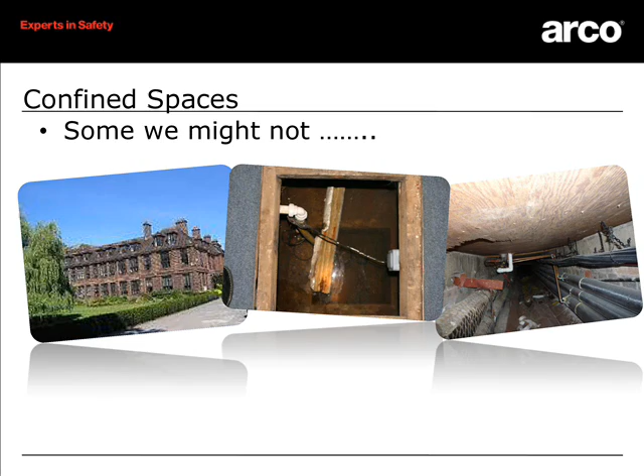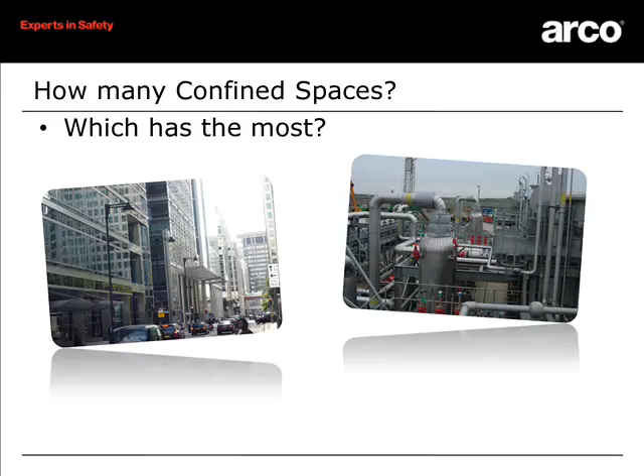Taking the building we've just looked at, just for the avoidance of anybody thinking he's talking about big buildings but I bet he doesn't really mean it, I bet there aren't any really - if you only need to right-click Google, you can find stuff out. Pemex is the... so this is in the public domain, so I'm not telling any tales, because you can't really do something like that without it being in the public domain.

That's the National Oil Company of Mexico, where they built that building, like many of the buildings down the East End developments in London, where they're built on a brownfield site. So brownfield sites are built near docklands, there's inevitable contaminated land and the like.

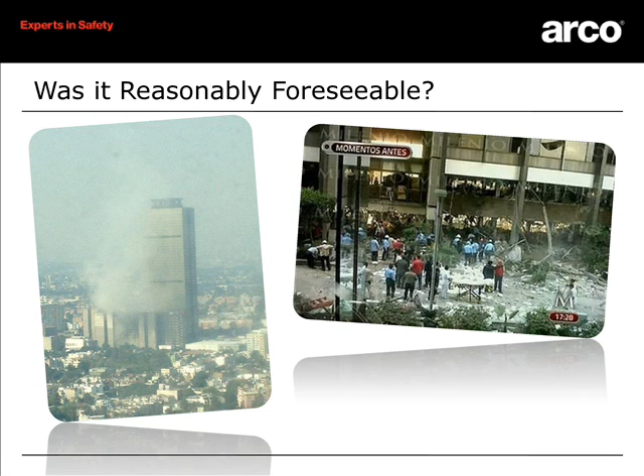For me personally, you're on this borderline thing: do I call it a confined space or not? It's the kind of place where when I went down the first time to look at it, was I gas monitoring, doing a personal gas monitor? Did I have an escape set on? Absolutely, because I simply wasn't sure where I was headed. We could pick up increased methane levels, but the main thing we can pick up down there is reduced oxygen levels. Don't forget, oxygen has only got to drop 1.4% to go from what is normal to what sets off the alarm on an oxygen monitor. Only 1.4% - not very much at all. So that's just making the point.

That's in London. So I've brought the Mexico thing back here now and I'm showing you exactly the same situation in the centre of London. I've worked down that one myself - confined space underneath a tower block in London.

So confined space types. We inevitably think of the industry. Industry tends, if you look at the City and Guilds accreditation for confined spaces, to be very simple: it's either water, or the other people that aren't water get the prefix non-water. So it's kind of water or everybody else. You get 'non', and the suffix changes from 02 to 52 for a training course - it's non-water. So my world would be the right-hand side bit here, non-water, and the left-hand bit is the water industry. But looking at what I'm talking about here, can we see other confined space possibilities starting to develop that we may need to manage? That's what I'm trying to get over.

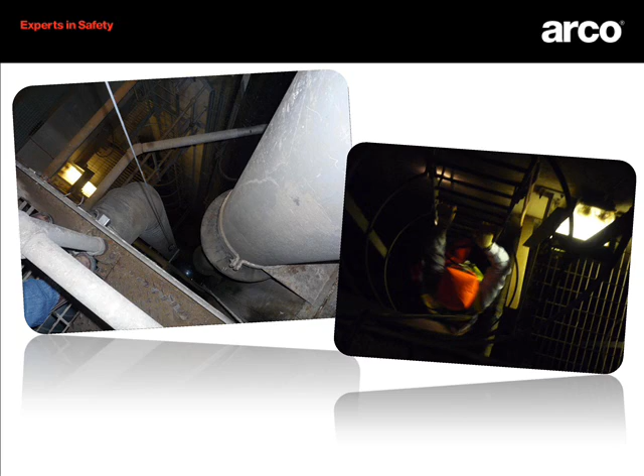So we've got the biological hazard to go with other hazards, and dust that might affect you in there. So we did some confined space training. So what is a confined space? In simple terms - it's not the place to do a confined space training course, by the way - but I've just looked at a couple of bits that you would normally talk about.

Somewhere that's substantially, though not always entirely, enclosed - so somewhere open-topped can be a confined space. All you need is heavier than air gas and we've got ourselves a confined space. And it's that reasonably foreseeable risk from substances in the space or nearby. So that's another thing to think about with confined spaces - not just the situation or the infrastructure that you've got, but what's over there, or over there, or over there.

I was asked to look at a pit the other week - Ken, can you come and look at this pit? We're thinking of working in this pit under an oven, is it a confined space? So I trekked down there to have a look at it. To be fair, it was borderline again, until I asked the question: what's in the big vessel just the other side of that screen over there, guys? Well, he said, that's the argon for the automatic welding plant.

And has it ever leaked? Oh, every other day, mate. I said, right, okay, so that'll be all we need then. If you open the doors at the far end of the factory, that leak will travel all the way down this pit, and it's goodbye and thank you to the maintenance people working there. Yeah, we never thought about that. Good job you come - yeah, you're absolutely right.

I think it is. So we're rigging stuff up to try and measure levels of argon travelling across the floor and situating people. You know, we always talk about having one standby person on a confined space - I had 4 on this, like it's an army, between there and here, to make sure if that gas starts to leak, we know about it and everybody's out of there. So it's just looking at the nearby bit as well.

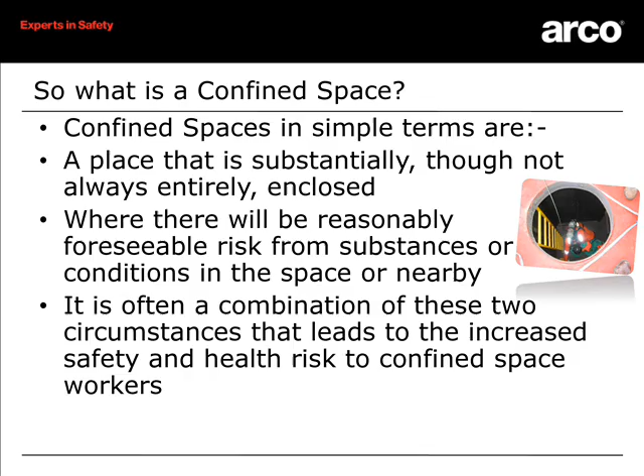So an example, a confined space hazard example - a restricted way. See, I've put way in and way out - I've resisted the temptation to say access and egress. All safety people say access and egress, don't they? It's always access and egress. A restricted way in and a restricted way out - so it's a hazard in itself. If we look at this, that's the standard 575mm diameter as recommended in the approved code of practice for the regulations.

575mm diameter on new build. However, most confined spaces I go into were built before 1997, and we've not seen the 575. The older I get and the bigger I get, it's more of a struggle. But the point with the photograph is, if we send a rescue team in wearing breathing apparatus, 575 is the size for somebody to get in wearing breathing apparatus.

We know how big the breathing apparatus is, but we've not necessarily specified the whole diameter needed for the whole operation. He did go in later on - I think somebody just pushed him in - but it's getting tight. I'm working closely with the fire and rescue services at the moment, and we had this discussion recently when I was in Essex: can we actually get in? Have we got the right equipment? Looking at rescue is something I want to talk about later. It's the same inside the confined space.

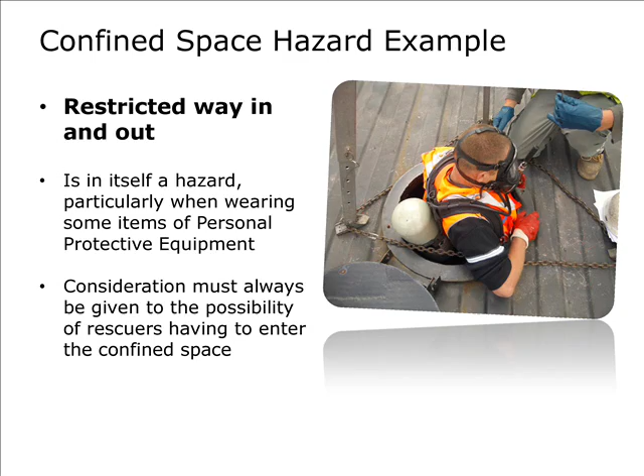When you get inside, these are some guys practicing rescuing the dummy - the man in green is the rescue dummy, 50 kilos, because I've got to have a 2-man lift and I don't want to break health and safety rules. If I do a full live rescue course, I'll let them try rescuing me instead - that's different, 95 kilos, a wholesome lot different. Trying to get somebody out of there is very, very difficult. That's the dummy, but the point is, they're in the confined space and it's difficult.

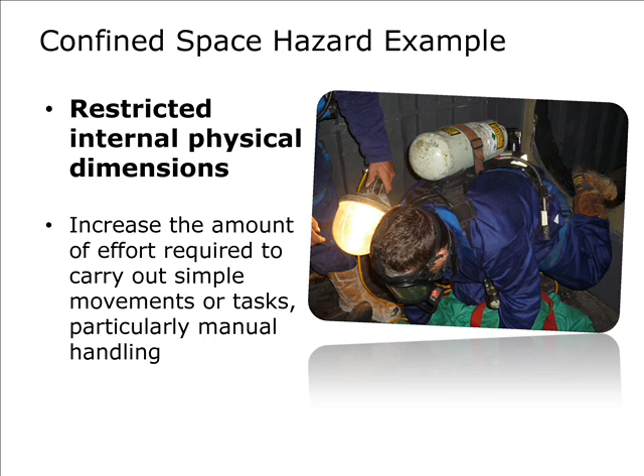It's tight inside confined spaces. There's one I made bigger - that's supposed to be light-hearted, by the way. The tank was no use, but I was decommissioning it anyway. So that's just to make a point.

The point is, don't work inside a confined space if you don't have to. In fact, you're challenged by the regulations - if you can do it from the outside, do it from the outside. If it's not reasonably practicable, cut a big hole in it. That stopped it, very, very simple - a fiver to the digger driver.

Then just thinking about the tanker, because that's back to my old life - when you've sucked all that stuff out and put it in the back of the tanker, you've gone off with another confined space, this time on wheels, but somebody's still got to clean that out as well. And so it goes on - we've got other confined spaces.

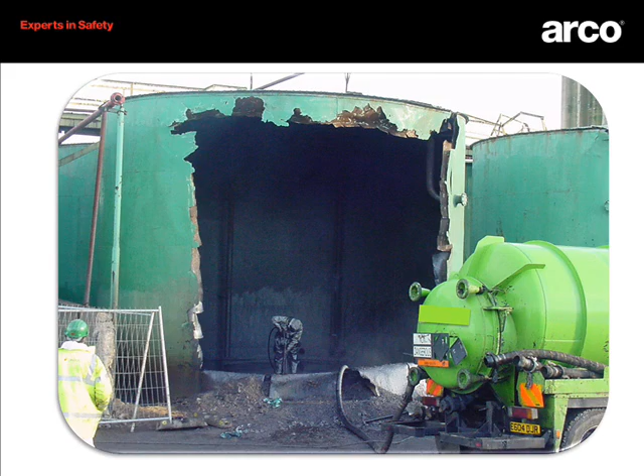So the first thing we've got to do is assess, have we got a confined space? We're going to look at those specified risks. Can it be done without entering the confined space?

We actually asked that, and I can tell you from experience, for 2 reasons. One was a negative experience - I once had a guy complain that his breathing apparatus had failed in a confined space, which you'll all know is RIDDOR reportable. It hadn't, but that was by the by. I got the attention of the Health and Safety Executive, and the first question I was asked was: prove to me that you thought about not going in the confined space. All this 'well, we've done it this way for 20 years, Gaffer' did not hang in there with him. It's proof to me you thought about not going in.

In a more recent life, I help the Health and Safety Executive on occasions with confined space investigations, and I can tell you that question is still asked to this day. If you take any advice from this evening when you deal with confined spaces, it would be: on your risk assessment, write down on the first line, 'I have considered not going into the confined space. However, on this occasion, it's not reasonably practicable to do it otherwise,' because that is the first question you will be asked, after 'is the kettle on?'

So if a confined space situation does exist, and remote operation isn't possible - you can't do it by remote operation - then a safe system of work has to be developed, and it's a big job to develop it.

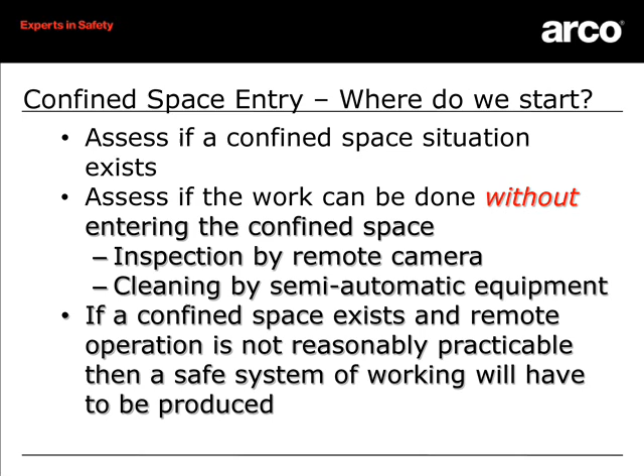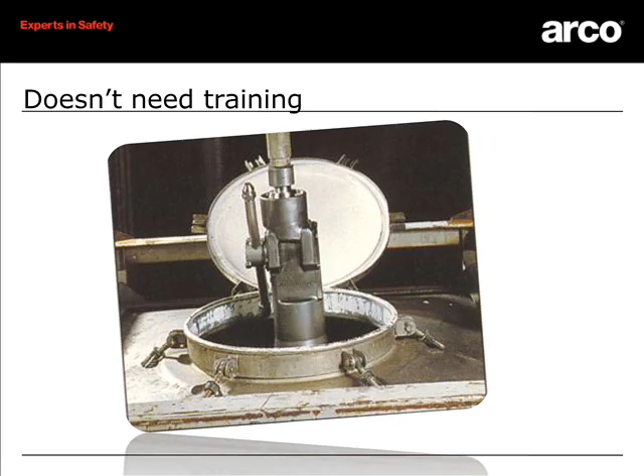For me, I always used to try and look for the way of not going in, because for me, as the boss as I was then, that doesn't need training and a lot of managing and looking after. I can operate that thing dressed like this. But if you've got somebody in a confined space with hazardous chemicals, cleaning it out, you have something to manage.

If you want to get your teeth into some health and safety legislation, some permits to work and some risk assessment, then manage that, because it really takes some doing. It really takes a bit of doing.

I remember the regulations came out in 1997. As the person who used to clean things out, I'm a tank cleaner really, that's about the size of it, but that was what the job was, getting hazardous stuff out of tanks. If you're managing somebody doing that, you're at the sharp end.

And I was really excited when the confined space regulations came out, because I thought it'll tell me how to do this job safely. I flicked through the consultation document. It says don't go in the confined space till it's been thoroughly cleaned. And I thought there must be more to this, there must be an appendix that tells you how to go in before that. But it just says don't go in till you've cleaned it.

So of course clients would ring and say, can you clean the confined space out, mate? So we can go into it safely, because the regulations say you can't go in otherwise. It's a bit of a circle, this. Now it's been the same ever since. Anyway, they say that takes a lot of managing, does that.

It's not the place for me to do health and safety legislation, but just think about all the stuff you're going to talk about: health and safety, work management, risk assessments, the regs, personal protective equipment, especially going inside there. Is it flammable? Will you need to earth out? Are you going to get static electricity? What will they be carrying?

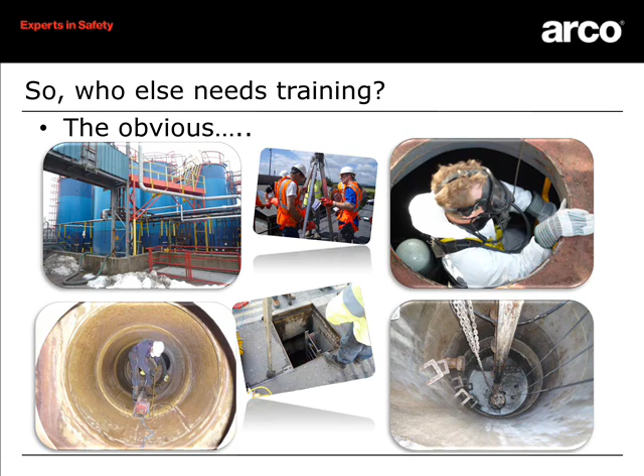Great. And then there's just the obvious, anybody and everybody, tanks and on the rail and grain silos, that's where those are taken from. There's the obvious people who need confined space training. There's the not so obvious.

This guy is doing welding. So if you imagine somebody fabricating a round tank, they do that horizontally, and it starts the day as a piece of flat sheet metal. Then they roll it together, and he welds the top seam. Then somebody lifts an end plate on, and he sits inside and welds the end in. Then somebody lifts the other end on, the one with the hole in, so he starts the day with a flat sheet of steel and ends up the day working in a confined space, and it's managing where that changeover point is. When did it cease to be a piece of steel and when is it now a confined space? Because welding drives away oxygen.

You know, when you sit looking over the wings, if you're unlucky enough to get the seat over the wings when you go on holiday and you can't see anything, inside there's the fuel. It's a fuel tank. If you get most Boeings, the entrance is under the wing, just near where you sit. There's a little hatch comes off that's about this big, and you go inside, and all the fuel level transponders and all the data that it sends out are inside there, and somebody goes in to maintain them and repair them.

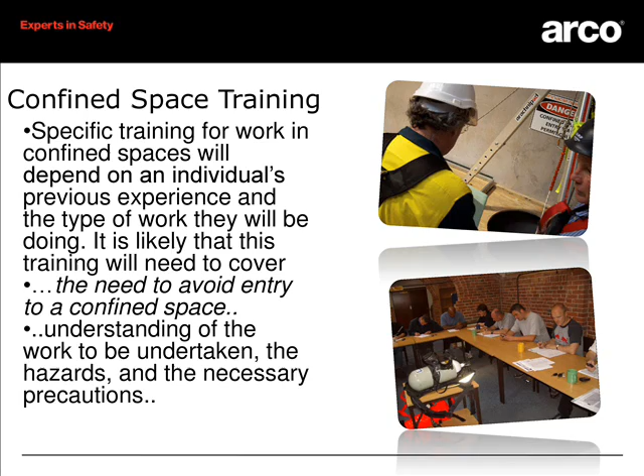I'm not going to read them all out to you, but we're talking about the need to avoid entry, which is a management thing first of all. So you need to teach managers and supervisors to think about not going in first, and what hazards are likely to be in there. Let's get the management side - safe systems of work, permits to work, how emergencies arise, how we respond to them, and the dangers of not doing so.

There's some guy on a customer's own premises there, with his own confined space arrangement - they have the premises, I do the training for them. There's something significant on that particular photograph which will come back out later on - those guys rescuing, or trying to rescue, a colleague.

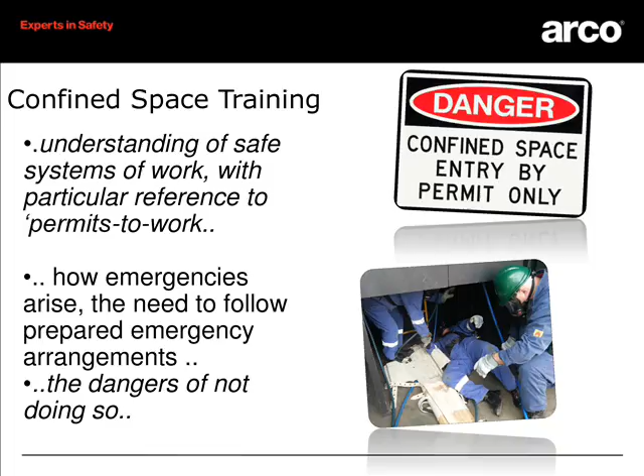So anybody doing confined space training, if you're going to go in confined spaces, it involves a practical element - you've got to do the practical bit. It should involve demonstrations and practical exercises, all from L101. So this is the bit where I right-clicked little bits and put it in - real easy to put these in. Atmospheric testing equipment - can the person use the gas monitor? Will they understand how to use it? The use of breathing apparatus, escape sets - are we geared up to do that stuff? Practice through to competence - I think you'll see that on a slide. It says practice through to competence before the first time you go in.

So people will ring me on a Monday and say, can we do some confined space training? Yeah, not a problem, what do you want? I've got 6 guys to go in a tank on Wednesday, could you fit them in tomorrow, please? Well, first of all, the answer would be no on all fronts. The point is, you cannot train somebody to go in a confined space in a day, because when you shout something's gone wrong, you need them to respond properly and come out safely. You don't practice that in a couple of minutes - it's got to be practiced through to competence, it tells us.

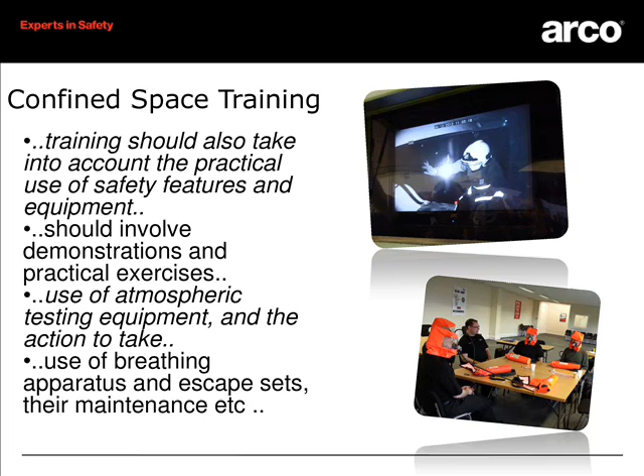Just getting the guys in the classroom, getting them happy. Even with the fire and rescue guys, we'll find some interest from that. Looking at rescue techniques and self-rescue exercises, rehearsals, might involve a full weight dummy. It's got to be realistic, not just drill based.

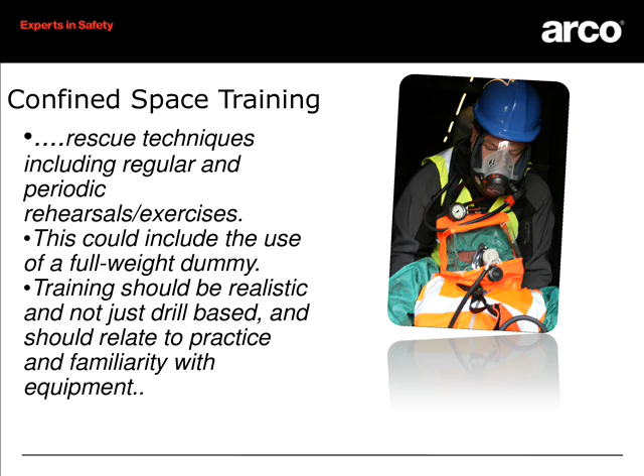So people who need this are the people who are going into confined spaces, and they're going to get this realistic. There's one of the dummies, not arguing much, but he's being rescued yet again. He knows it better than they do now. He's getting quite good at it.

Managers and supervisors - I have a thing about them sadly not coming on confined space training courses. Over the past, since the mid-1990s, I've probably trained hundreds, maybe thousands of people to do confined spaces. I've lost count. All the managers I could probably get on a London bus.

Sadly, the people often doing the risk assessment, writing out the permit and developing the safe system of work for the person to go in the confined space have never done any confined space training. I don't quite know how that would hang together if we had to explain it to anybody. When we're trying to explain our accountability, it may be difficult, that one for me anyway.

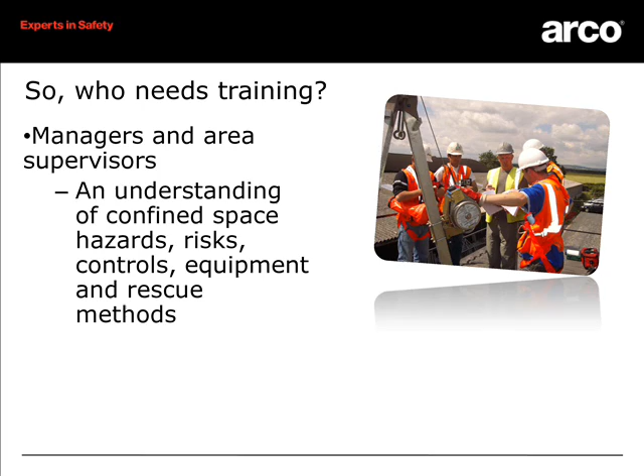Even if you've got a contractor in, like I used to be, and you've got confined spaces in your area, surely you'd want to know what's going on - particularly if you're going to issue the permit to work to the contractor to say this confined space is okay to go into. But that's maybe me, I just think it is.

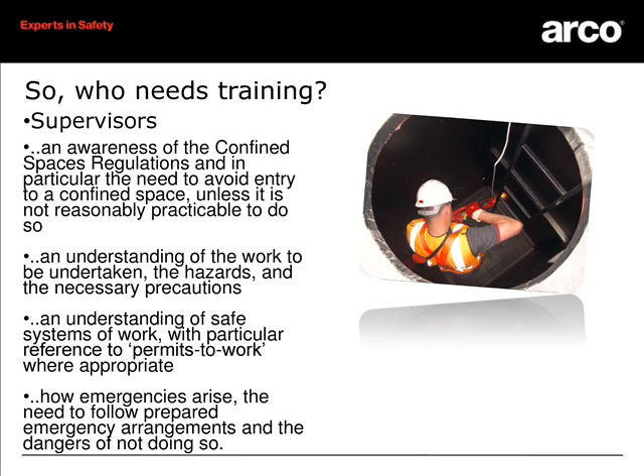Supervisors need an awareness of confined spaces quite in depth - talking about the hazards, the precautions, understanding the need to go in and safe systems of work. So anybody supervising that situation.

Then the guys going in themselves need in-depth knowledge, theoretical and practical, it tells us. And there's my practice through to competence bit - didn't make that up, simply right-click, put it in the slide. It's that simple. That's exactly what it's talking about.

So, self-rescue. The self-rescue bit is sometimes a mystery. I go to confined space jobs and look at them, and I see people running about in the confined space wearing a gas monitor, an atmosphere monitor, for a variety of gases, or all gases, or one gas, or maybe just oxygen.

And the question you've got to ask is, if it goes off, what are you going to do? Because if you've gone to the far end of a complicated confined space and the gas monitor goes off because there is a gas, all it's going to tell you is you're going to die. You may as well have died relaxed. These two things, to me - the escape set and the gas monitor - are inextricably linked.

If you need gas monitoring, you need a method of getting out, because if you specify gas monitoring, you're saying to people, I think there might be a problem, I haven't managed all those problems. So just as a little bit of backup, put a gas monitor on, mate, because I might not have cracked it. Then not give anybody an escape set to get out - I just do not understand how that hangs together personally. I just cannot see it.

Similarly, I've found less people - because those cost more than gas monitors - but I've seen it the other way around: wearing an escape set and no gas monitor. Well, how the hell are you going to know when to use it? It just does not hang together.

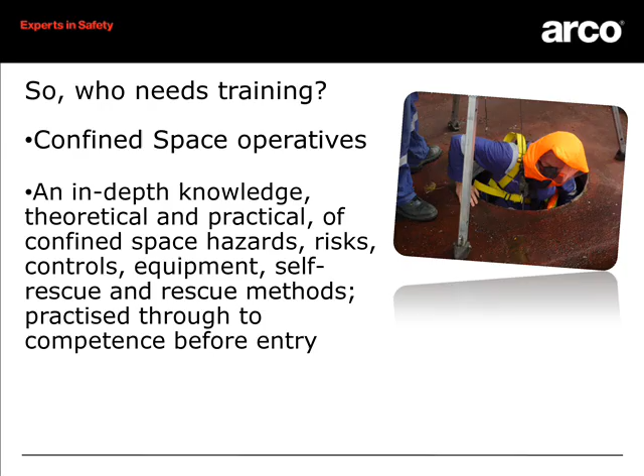And then there's the people for standby - they'll need some theoretical and practical knowledge, so there's specific training for the person standing outside. All these different roles have now been taken by people like City and Guilds and made into different courses - a management course and a standby person's course, divided into risk levels: low risk, medium risk and high risk. So the whole accreditation process has gone right across the board with all these.

So it kind of squares off what I'm saying here, that I think these people need training, and City and Guilds certainly wouldn't be doing that if they didn't think there was a market for it. So they've certainly put that forward. Then the people doing the rescue - it says in the confined spaces regulations, again similar to the work at height regulations, don't rely on the emergency services.

It says in the regulation that reliance on the emergency services will not be considered sufficient to comply with these regulations. It means get sorted to do something about it yourself. You may have the guy three-quarters of the way out of there before the emergency services arrive.

Now there's the other photograph with the significant thing on it. Anybody spot what it was? It's the airline breathing apparatus. You know when I showed you the guy climbing in with the cylinder on his back? That lasts 30 minutes, hypothetically, based on 40 litres a minute.

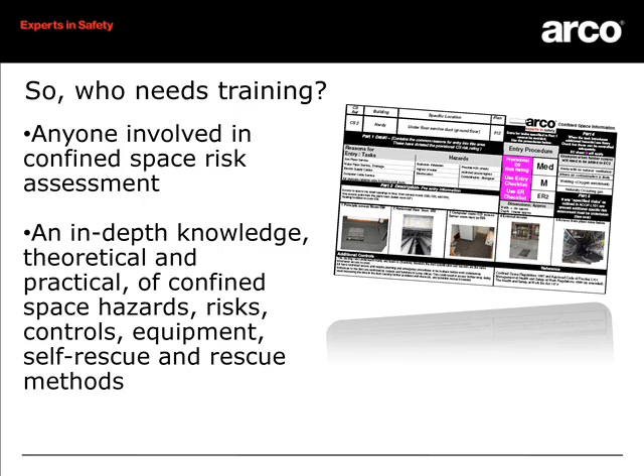Is that the practical training has to be safe. For me, it's absolutely in there. I hear of people being injured going down makeshift tunnels, old underground shafts, brick culverts. One of the requirements we've got when we're training the operative that's going to go in, it says make sure that they're mentally and physically suitable.

Mentally suitable means they're not claustrophobic or afraid of the dark, I'm afraid it's that simple. Every so many weeks we get somebody who is. So what would happen if you'd sent them down in a deep, dark, disused sewer or shaft under this building to find out then that they have a problem? Because right in the middle of your confined space training course, you have a confined space crisis now, because you've got to go and do that rescue. So there's issues there for me.

So above all, it's got to be safe. To me, you've got to be able to flood the confined space with light instantaneously. You've got to be able to adjust light levels to acclimatise people to confined spaces, like athletes acclimatise themselves to the atmosphere and levels of oxygen. People have got to get themselves adjusted to working in the dark. And when you get novices, and we do regularly, I was doing a course middle of last year...

And this guy, real big guy, looked like the type that might be a forward at rugby, much bigger than me, said, 'Can I have a word with you at break time, mate?' I said, 'Yeah, no problem. What's the issue?' He goes, 'Frightened of the dark.' And you don't expect it. You stereotype this guy, this big, strong, he's not going to be frightened. He said, 'I've got to get my 6-year-old. If the power goes off at home, I've got to get my 6-year-old. We've got torches and night lights everywhere.' He was never going to go in confined spaces, was he? He's not going to be the one to go into that confined space, into that darkness.

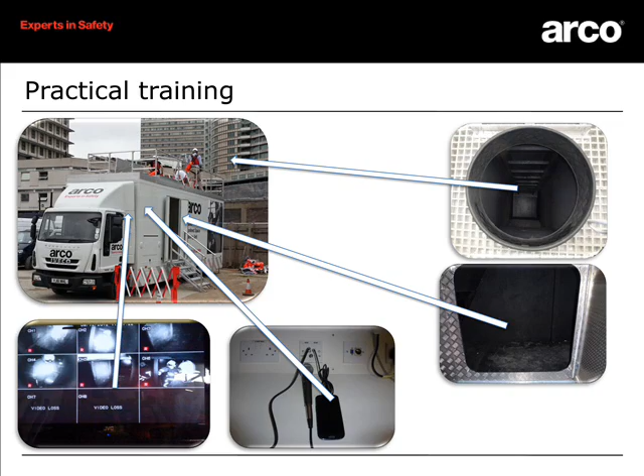I would say Nigel just showed you that over there. That's not a selling brochure, by the way - somebody said, 'Can you write a bit of a thing about confined spaces?' So I did, and it's not right-clicked off Google, it's the thoughts of a very old confined space controller, basically. So it's kind of advice as much as anything on confined spaces. Very welcome to take one if you wish. If there are not enough, get in touch with Nigel, get in touch with me, I'll post some more down if anybody else wants them. At that stage, I would like to say thank you and ask if there are any questions.

I've got a question with two parts, both relating to contractors. You mentioned the necessity to avoid confined space work. I have one client whose approach to avoiding confined space work is to contract it out. We'll call that risk transfer. My concern is the contractors coming in aren't going to say 'we don't think anyone should go down there,' because that's their business. So the question is what position we'd be in having made a decision to just get contractors in, having missed that step of how we could avoid it.

The second part relates to permits. That client's approach is that if it's a contractor, they have to work under their own permit system, not under our permit system. So we won't give them a permit to work in our confined space - they have to have their own permit system so they check it's safe. So how do you feel about both those parts?

Well, the first part referenced contractors. I'd say you have a responsibility to make sure the contractor is suitably trained before they go into the confined space. It says so if you read closely in the ACOP - you've got to make sure people you allow into the confined space are trained. That's your section 2, section 3 bit - section 2 for them, section 3 for you. One of the cases I did for the HSE was exactly that.

It was a mechanical operations contractor who were going to change some spigots on a tank, only to find the tank needed cleaning because it had a nasty product in it. The client said 'can you do that?' and the guy said yes, and sent somebody in. The guy died in the tank - a youngster, 20 years old, burnt to death, resulting in a jail sentence. That was a classic case. The contractor was prosecuted, and so was the client for letting them do it. So that's the answer to that question, I hope.